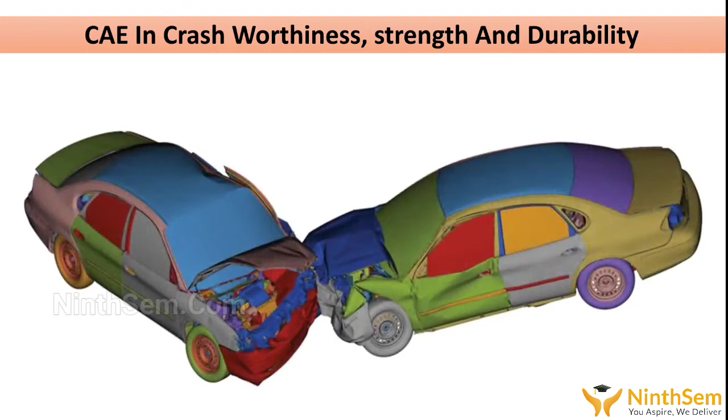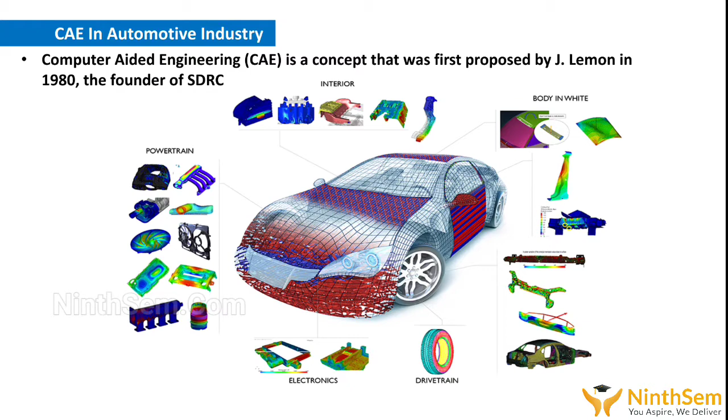Today we're going to discuss mechanical CAE in automotive design. Let's start with the basic introduction. Computer aided engineering is a concept that was first proposed by J. Lemon in 1980, the founder of SDRC, as a way to provide analytic information in a timely manner in the product development process, and through doing this, great improvements to product and production process are made possible.

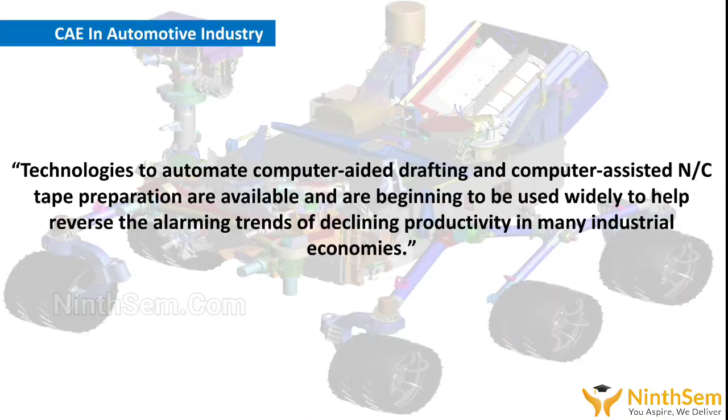According to Lemon, technologies to automate computer-aided drafting and computer-assisted NC tape preparation are available and beginning to be used widely to help reverse the alarming trends of declining productivity in many industrial economies. So when we talk about CAE, we go to the conventional development procedure and how CAE affects it. So let's look at the conventional development procedure.

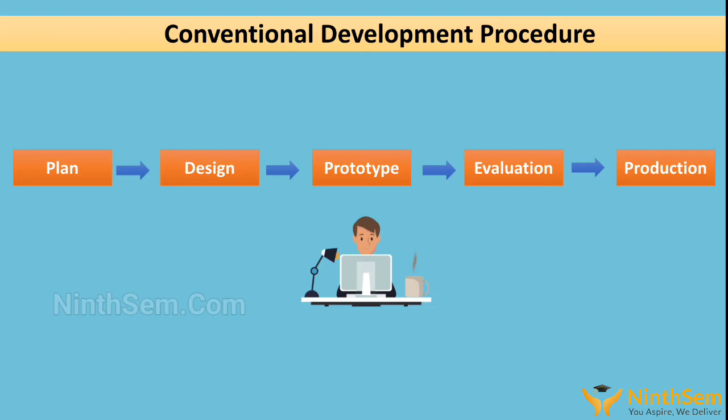The development of all mechanical products, not just an automobile but in many sectors, proceeds through a series of steps. The first step is planning, then designing, then prototype, then evaluation, and then final production. The fourth step, evaluation, plays a very crucial and critical part. If the prototype, when evaluated, doesn't meet our standards or requirements, then it again goes to design. Hence there is an iterative cycle between design and evaluation.

Let's say we make a plan and a design, then we make a prototype and we evaluate it. If that works fine, then we go to the final production. But if, based upon our evaluation, it doesn't meet our requirements or standards, then again we go to the design part. That is, again we have to restructure it.

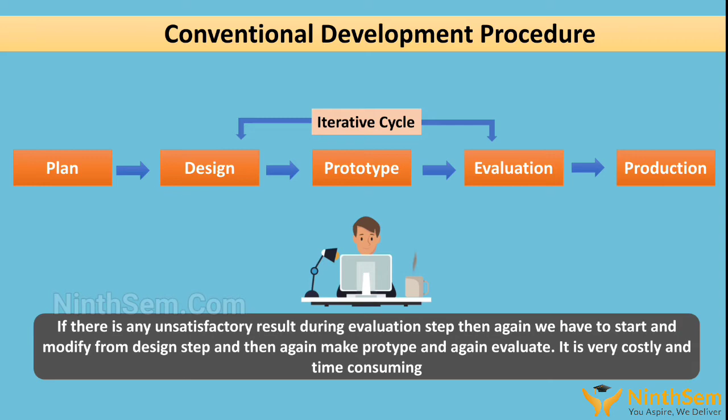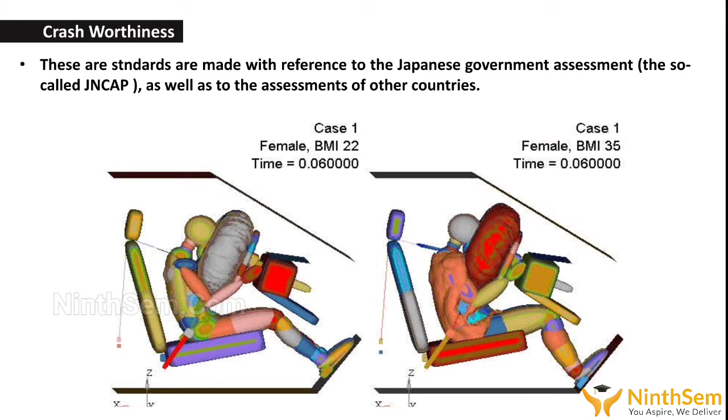So now let's talk about CAE in terms of crashworthiness. A number of media outlets say that crashworthiness is the most critical item to each automobile company standard, which are made with reference to Japanese government assessment as well as the assessment of other countries. CAE as numerical experiment is used here to calculate large deformation non-linear analysis, which has recently been used in conjunction with human body models.

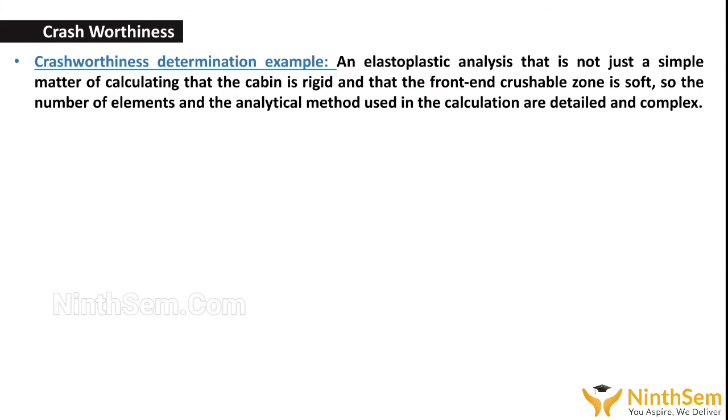Crashworthiness is determined by, for example, an elastoplastic analysis that is not just a simple matter of calculating the cabin. The cabin is rigid and the front end crushable zone is soft, so the number of elements and the analytical method used in this calculation are detailed and complex.

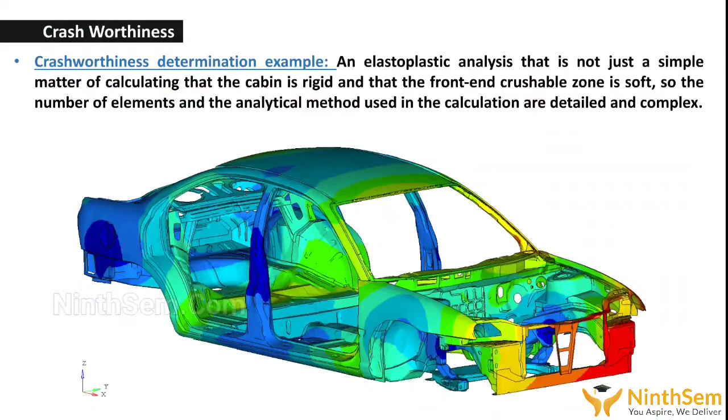So let's look at the difference between the development procedure with reduced iterative cycle by CAE and the conventional development procedure. The conventional development procedure has 5 steps: plan, design, prototype, evaluation and production. Whereas with CAE we have 6. That is, we introduce CAE in the third step: plan, design, then CAE, then prototype, then evaluation and then the final production.

Here we see a massive advantage: we don't have to go till the fourth step, which costs us a major amount of time, resources as well as workforce. If a design works well, we can check its output in a real life simulation using CAE, computer aided engineering, and once we find it suits, then we go to the prototype, then we evaluate it.

As the design and the CAE have been evaluated in the previous steps, evaluation plays a less important role, and the iterative cycle which was continuing from evaluation to design has been reduced dramatically by the introduction of CAE in the procedure. Hence in CAE we plan, then we design, then we have the CAE model, which is also included in the design and helps us reduce time, cost and major resources. Then we go to the prototype, then evaluation, and finally production.

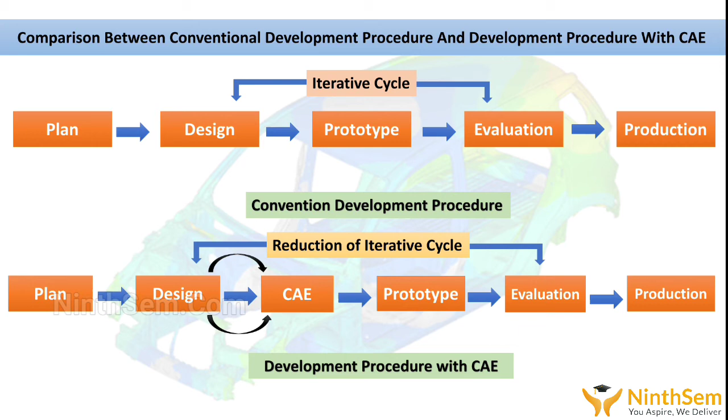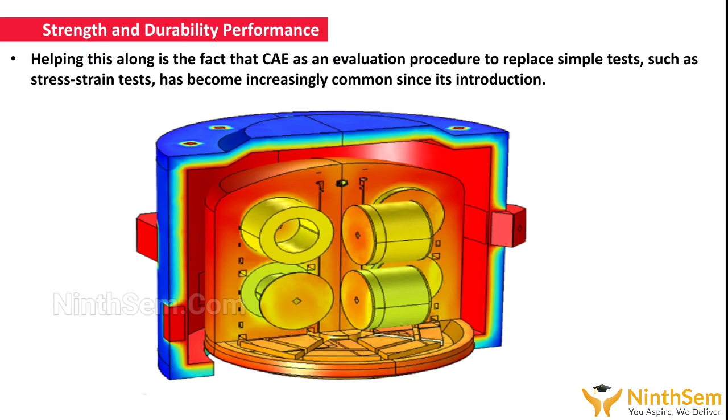Talking about strength and durability performance. In contrast to crashworthiness, which requires an analysis that handles rigidity and elasticity well, the analysis of strength and durability performance requires the discontinuity of localized rigidity be cancelled out. Helping this along is the fact that CAE as an evaluation procedure to replace simple tests such as the stress strain test has become increasingly common since its introduction. So that's all on CAE in crashworthiness and strength and durability aspects.